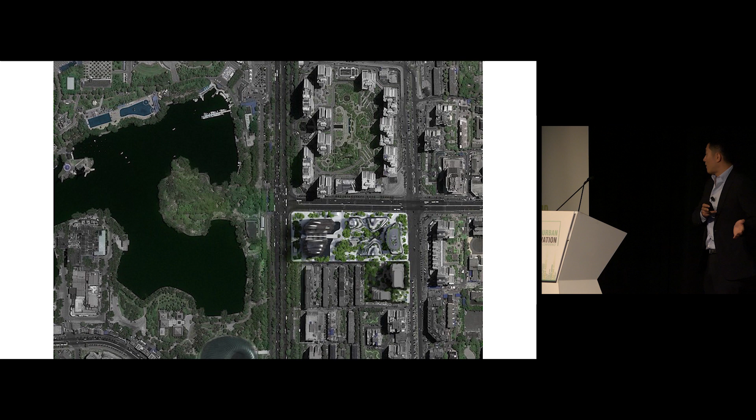Back to the project. Right next to the park, we wanted the project to become an extension of the park, not just another tower sitting at its edge. So the main tower becomes the backdrop of the park, or the landscape element of the park.

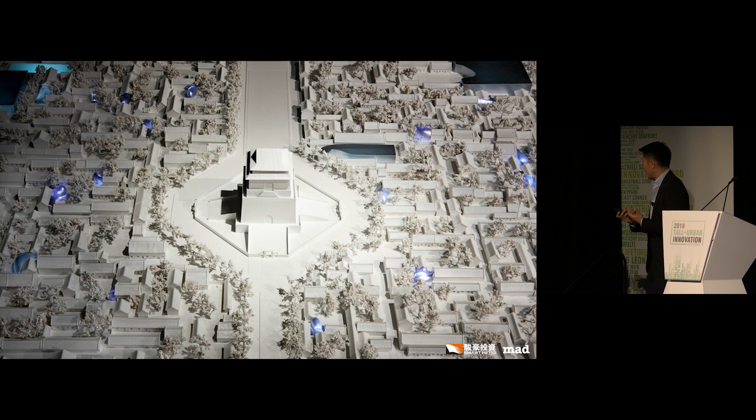On the other side of the site is all urban context, where we used to have beautiful courtyard spaces and hutong spaces, which are slowly disappearing in Beijing. But those places really captured human life, especially human scale, in such a large part of town. Instead, they built all those modern towers there. So our challenge is how to balance both the park and human scale urban life at the same time.

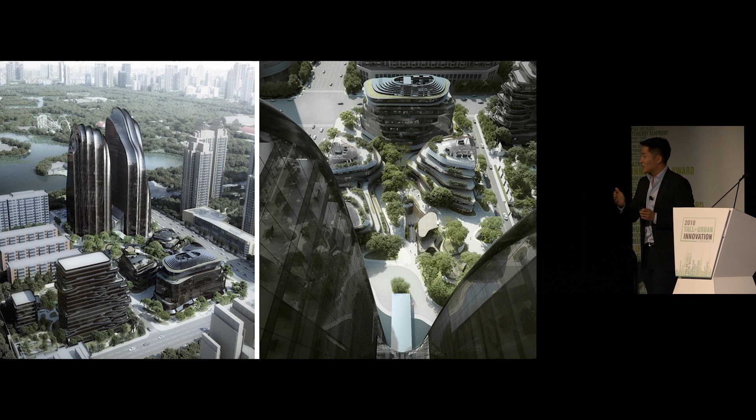What we proposed is two main towers sitting at the edge of the park, and on the other side, smaller scale, 4 or 5 story towers right in front, creating a kind of valley feeling that people can wind through to get to the tower.

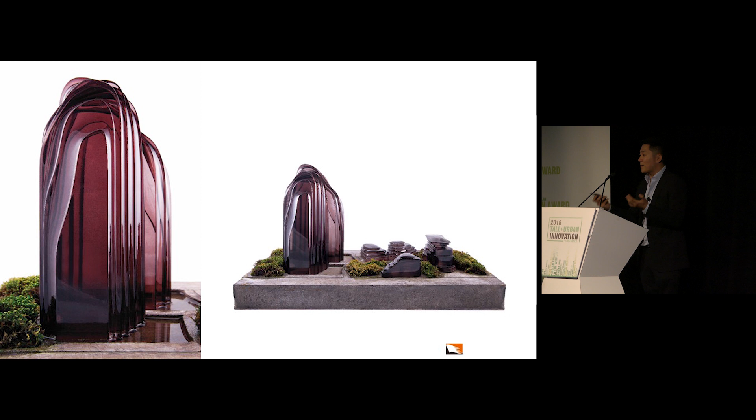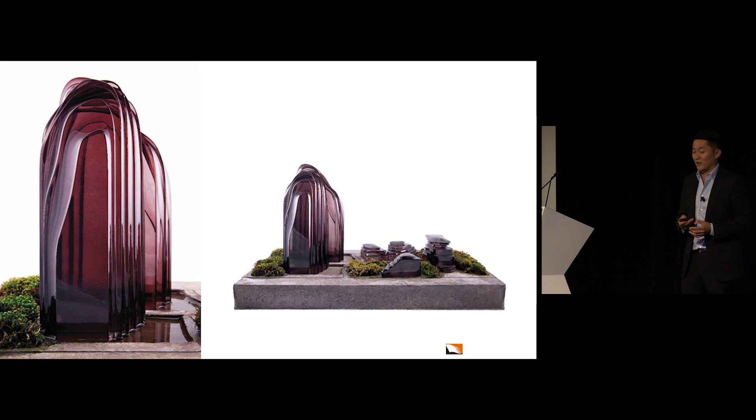It's literally like those miniature landscapes Asian families always bring into their homes, where you have two mountain ridges, then a small stream going in between, collected at ground level into a pond, with a group of small rocks appearing as the low-rise buildings here. Our ideal city should always be a combination of old and new, respecting the old while welcoming the new.

At the same time, we always try to live very harmoniously with the lake, the nature, and the people who really live around it.

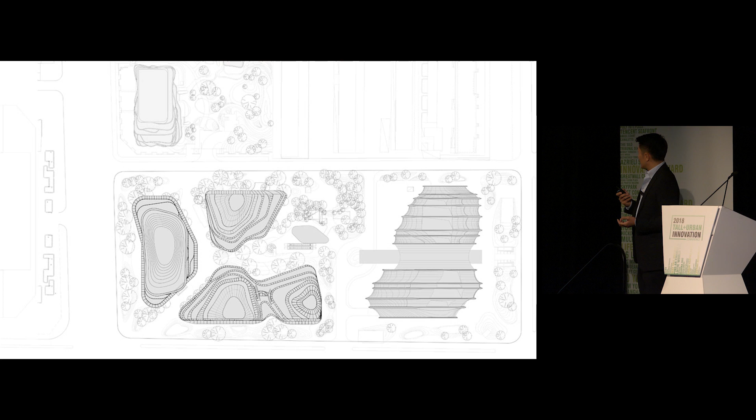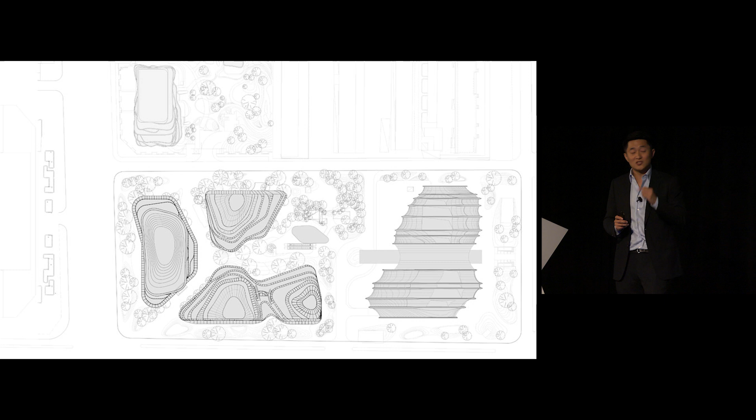Some technical details of the project: the site itself is around 300,000 square feet. On the most right-hand side are 2 office towers, in the middle a small group of retail space, then another office tower on the left-hand side, and on top we also have a residential component.

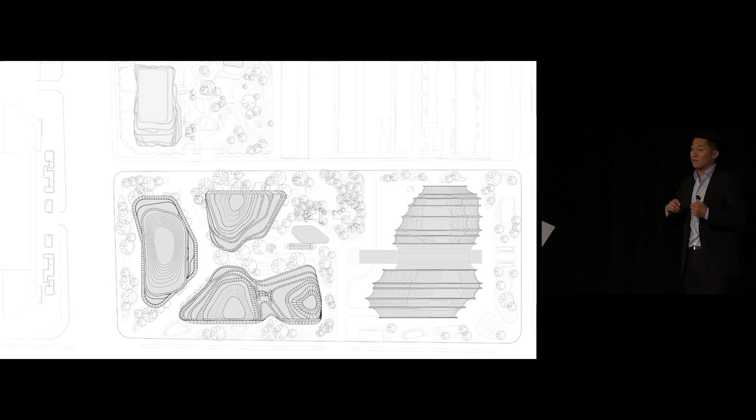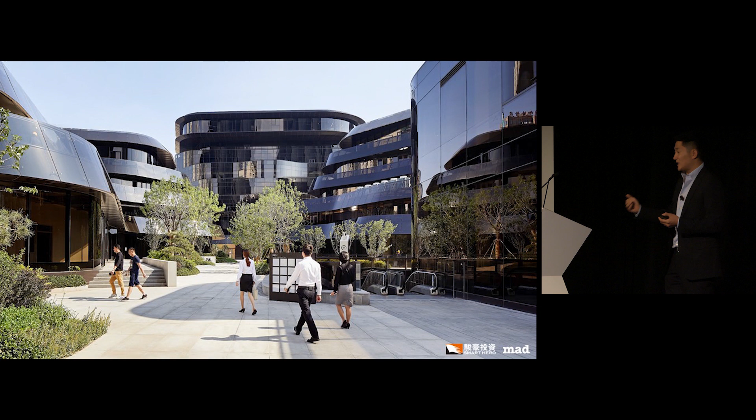You enter the site through the city, because there's a big transit hub as well. People go through the transit hub and enter the small-scale buildings where all the retail is, then through that they get to the tower, which is connected with atrium space in the middle.

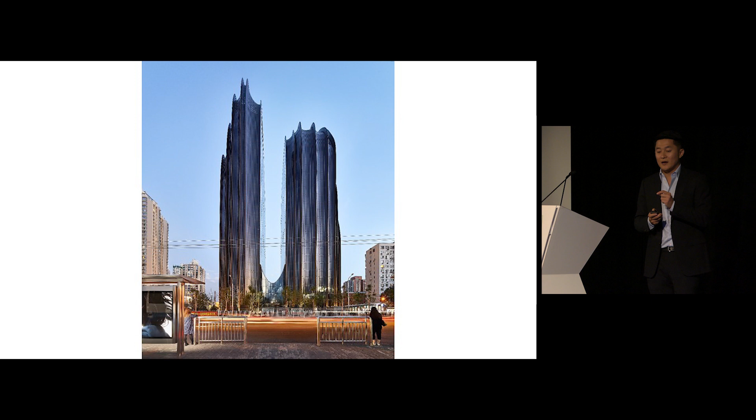Actually we did a lot of tests of the glass. We have outside opaque glass, and inside we use ultra white glass. We did a lot of tests on that, and it worked very well in terms of the coloring scheme.

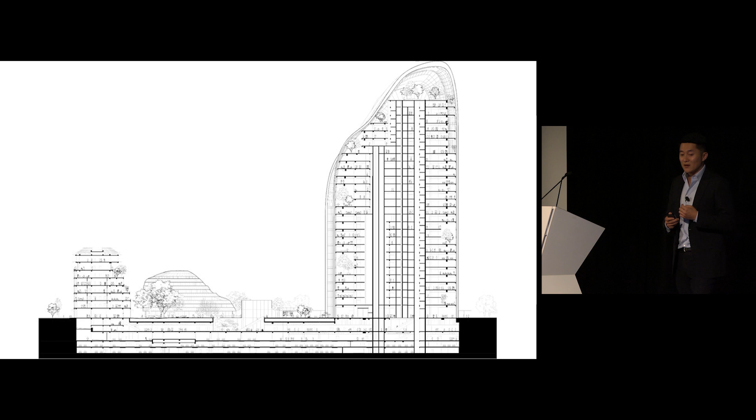Because the two main towers are very enclosed, we wanted to bring green into a modern tower vertically as well.

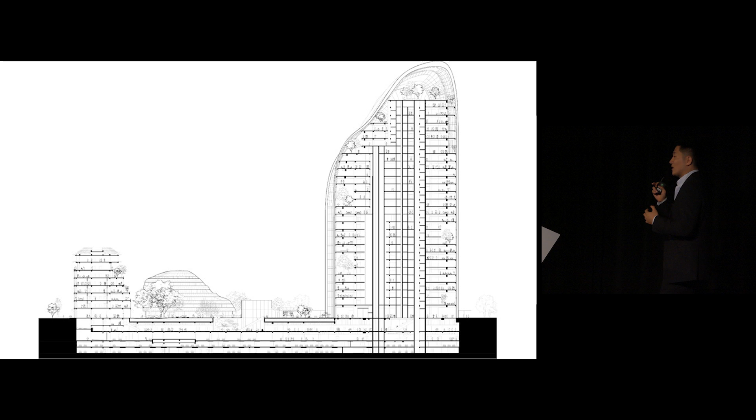Among the towers, we created a lot of double-high and triple-high seating spaces, which become indoor gardens. So all the people who work there have both visual access and physical access to those gardens.

On top of the towers, we also placed two very major event spaces.

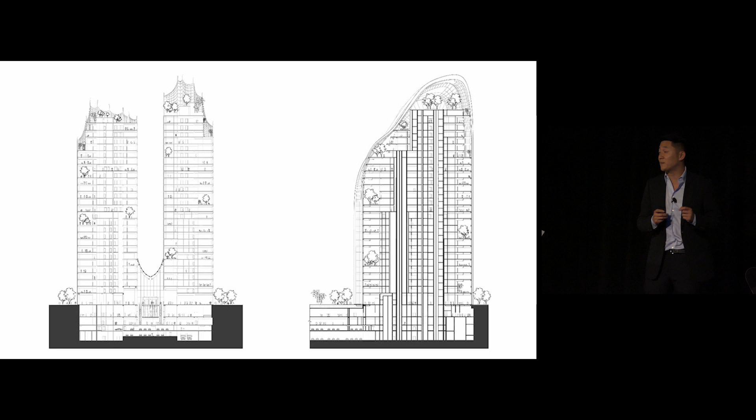The project itself was awarded LEED Gold.

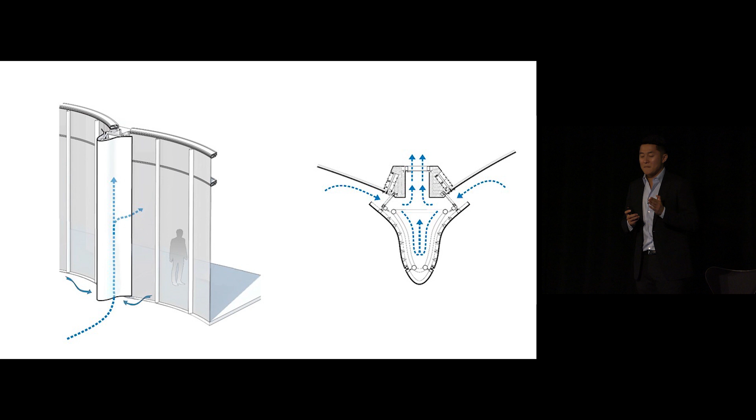One of the very important elements to get the LEED Gold is the natural ventilation. The main part of the tower is all those vertical fins, which actually act as a ventilation tool.

On the ground level, air passes through a pond of water, which brings in cooler air and also filters it into the building before bringing it up to the tower.

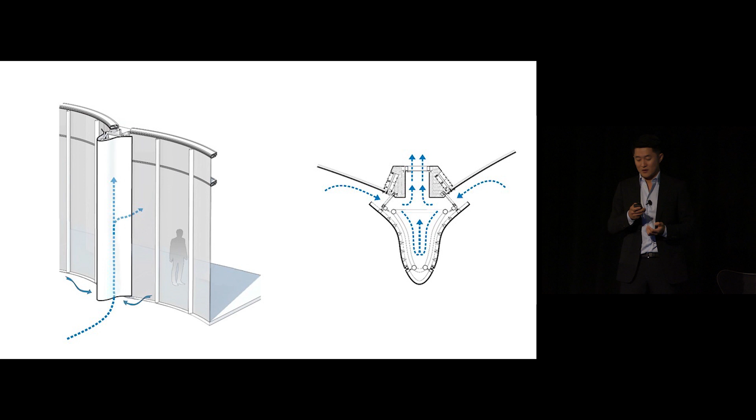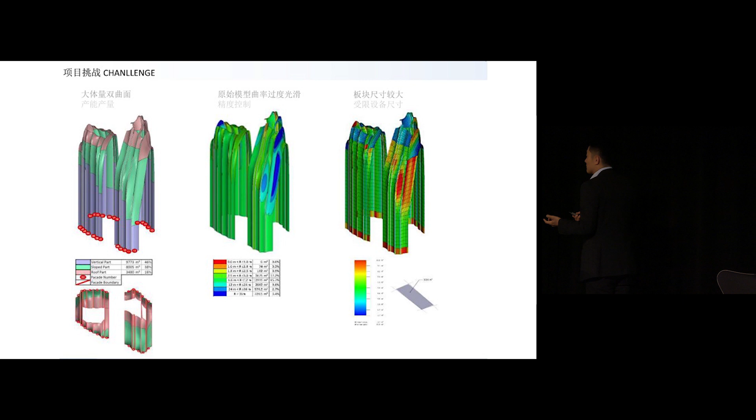Of course, the challenge of this project is the facade. Typically, as we design, we always have very aggressive conceptual ideas, and for this project there were too many double-curved glass panels in our first scheme.

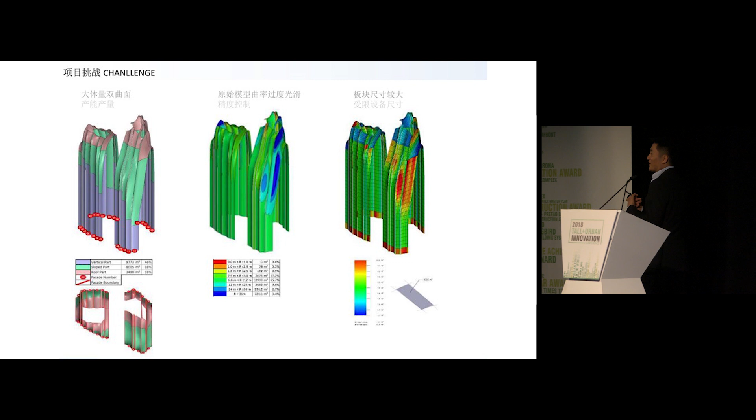We met with our enclosure consultants and fabricators, who were really amazing and very supportive, giving us a lot of good technical input as well.

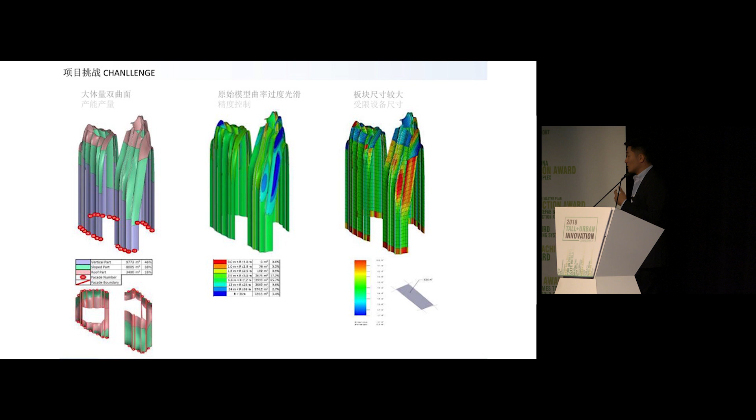So we started to rationalize the glass while also modifying the shape of the tower to accommodate that technical input from them.

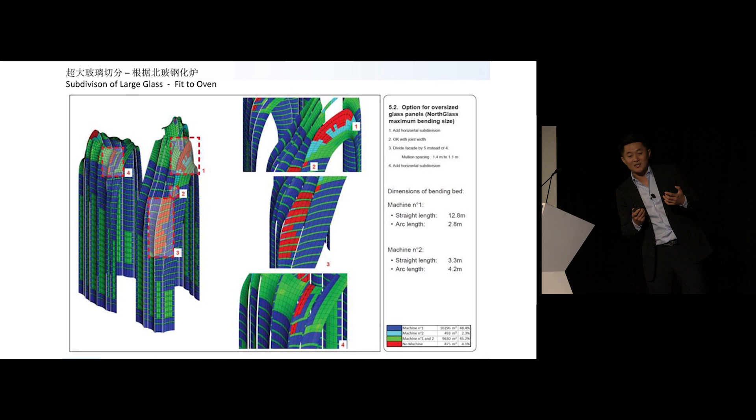By rebuilding the geometry and re-dividing the glass, we managed to convert most of what used to be double-curved glass into cold-bent or single-curved panels. Just a very few pieces at the top remain double-curved.

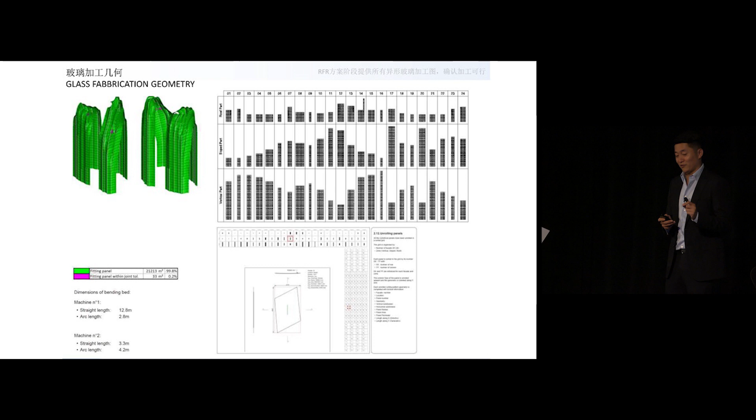I want to share some photos of the construction. It's very simple—just a concrete structure in the back, and then we have the cladding on top.

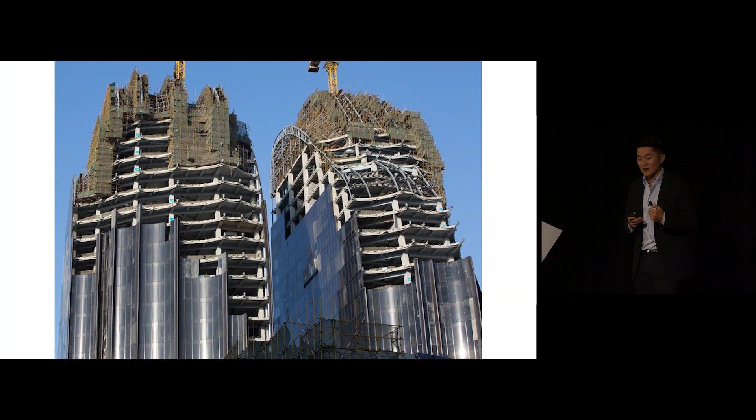Regarding our client, they call it the Smart Hero. They've been our client almost since day one of our career.

We are a 15-year-old firm, and they've been very supportive throughout many different projects we've completed for them. This project is very special because the site itself is very important in Beijing.

It's almost in the center of the CBD and in the very sensitive part near Chaoyang Park. They came to us immediately because they believed in the philosophy behind us, the Shanshui City, and they believe design brings great value to their projects.

Unfortunately, they cannot be here today, so I'm going to share a small video from them.